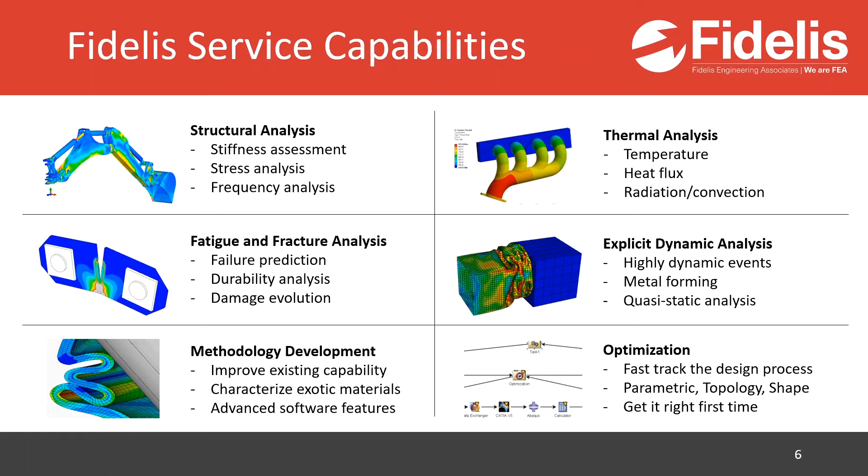Our software offerings range from the 3D Experience platform, which I want to talk about a little bit more later on. We do also offer Dassault standalone CAE products, so that ranges from Abaqus, which is the FEA solution, FE-Safe which can deal with durability, Tosca which allows us to optimize shape and flow, and Isight which is a process optimization software.

We do provide industry-leading support, with all of our engineers also being Dassault certified support experts. So again, that feeds into our narrative of being a customer-centric business.

So to get into the real crux of the presentation here, what are we talking about when we mention the shifting role of CAE in product development? Well, what we're really saying is we're moving from hardware-driven design more towards simulation-driven design.

Traditional hardware-based product development methodologies are break, fix, repeat type methods where we are doing a lot of physical testing, a lot of prototyping, and it's very expensive and very time consuming. Typically CAE might fall in at the very end of the process as more of a box to check. I think most of you on the call, if you're in the product development realm, might be more of a hybrid math-based product development method, where we're looking at still physical testing driven design, but supported a lot more by simulation. So we are learning still from our simulations, but we are predominantly physically based.

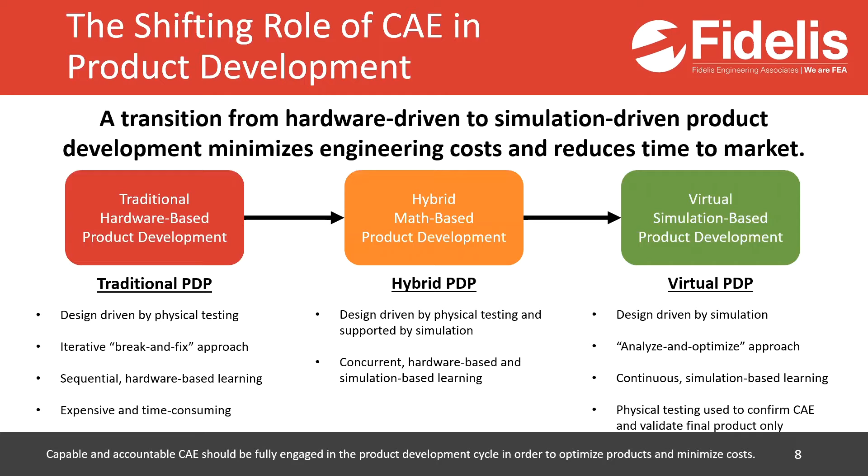And what we all really want to get to is this kind of holy grail, the virtual product development method, where we design by simulation, we optimize by simulation, and we are continuously learning using simulation, and then finally maybe validating at the end with physical testing.

Why do we want to do that? Well, simply put, it's cheaper and it's faster. We can front-load the problem solving part of the design process to the start, rather than having it at the end when we've spent a lot of money prototyping and designing off best practices. It eliminates trial and error engineering, and reduces development costs and time to market. We can reduce the number of physical tests or maybe eradicate them altogether. We can eliminate unnecessary development cycles, going round in circles where we're not really sure what's going on. And we can minimize quality issues that sometimes occur at the very end of the product development cycle once we think we've finished.

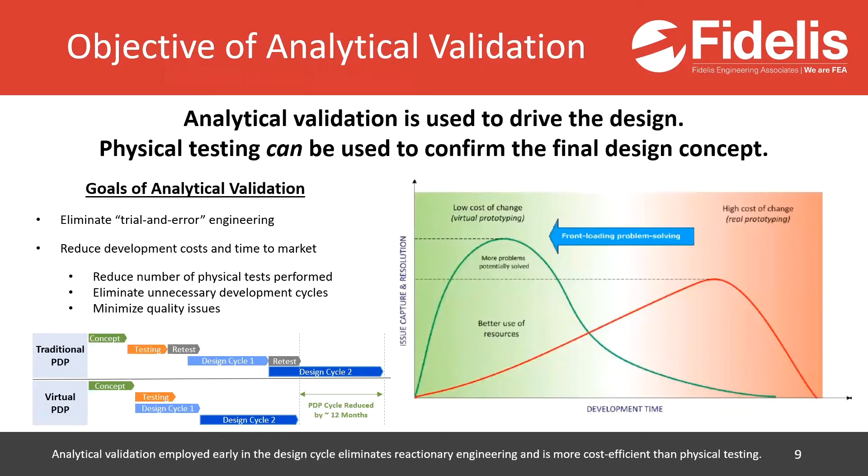So the virtual product development process still relies on having the right people in place. This quote I always like: owning technologically advanced software is not the same thing as truly being technologically advanced. We can own all the software in the world, but if we don't have the right minds to pair it with, it's essentially useless and a black box.

This is where Fidelis gets to separate itself from the rest of the more traditional FEA suppliers in providing end-to-end virtual testing workflows. What we need to do is understand the product development process properly, develop novel solutions to the unique engineering challenges that we face, and then importantly, package methodologies and results effectively so they can be used going forward.

The rest of this presentation will be based loosely on a case study that Bill and I worked on over the last 2 or 3 years, and that was with a predominant tier 1 supplier of axles in the Detroit area. We were tasked with developing CAE prediction methodologies for between 30 and 50 physical tests. The 2-year project was very successful.

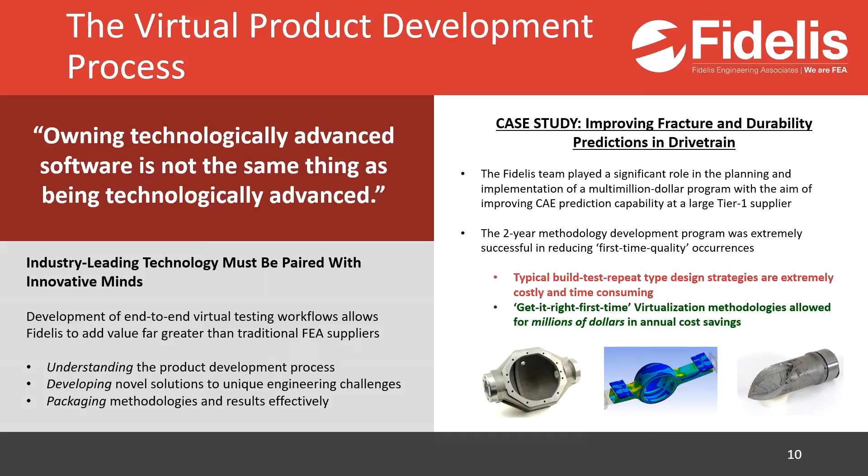We reduced first-time quality occurrences significantly, and that allowed us to get it right first time, save millions of dollars in annual savings, and kind of put to bed this old-fashioned build, test, repeat type design strategy that was there previously.

Before we go any further, it's useful to introduce the CAE Maturity Scale, or the idea of it. What we're looking at here is a way to characterize how much faith we have in our CAE methodologies, starting at 0, where we say we just cannot simulate this at all. Level 1 might say, well, we've got some capability, but it's not really very useful.

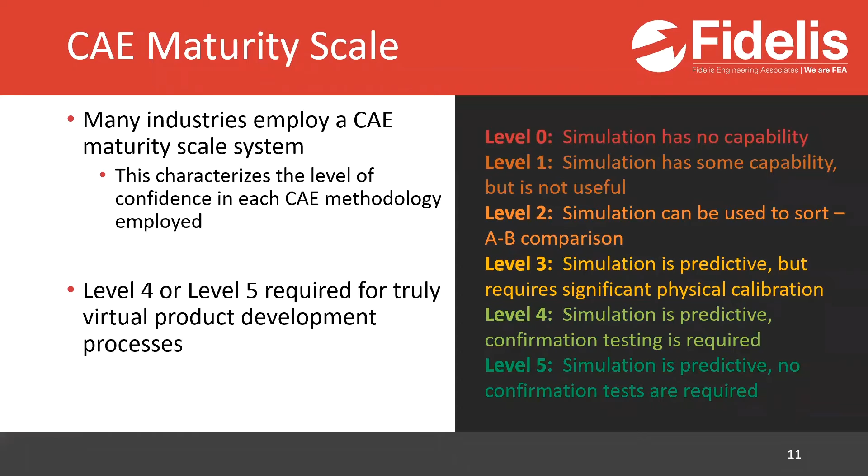Level 2, we can sort using A to B comparisons. And then really where we're aiming to get towards is level 3, simulation predictive, but not without physical calibration or a lot of physical testing. And then 4 and 5 is where we want to be. It's predictive, confirmation testing may or may not even be required.

So what were the challenges of going virtual? With this being more of a philosophical discussion rather than technical, we thought it'd be useful to focus on our biggest non-technical challenge that we faced during our 2 or 3 years. And that was conveying trust in a virtual product development process.

Typically, with traditional CAE, management might deal with the check in the box, as you will, at the end. They don't really see a huge amount of value in CAE. It's more of an afterthought. Designers might view it as kind of a nuisance where, well, you're telling me my design's not going to work, but I don't really believe the answer that you're giving.

Project managers think it might be inaccurate. They've seen a lot of data and they've kind of seen the CAE and it doesn't necessarily match up. And then testing engineers know it's inaccurate because they see the data every day. They just know that the CAE often does not match up with that. And there's a good reason for this. We'll take a look at it now.

Traditional CAE will provide one single data point when we ask a question such as, how does this part or assembly perform? I've got a little imaginary case study here, and we're going to ask our CAE department, how many cycles will this differential case see before it breaks? So we run our CAE, and we say it's going to last 274,698 cycles. I can tell you now that you have more chance of winning the lottery than that being the correct answer to this question.

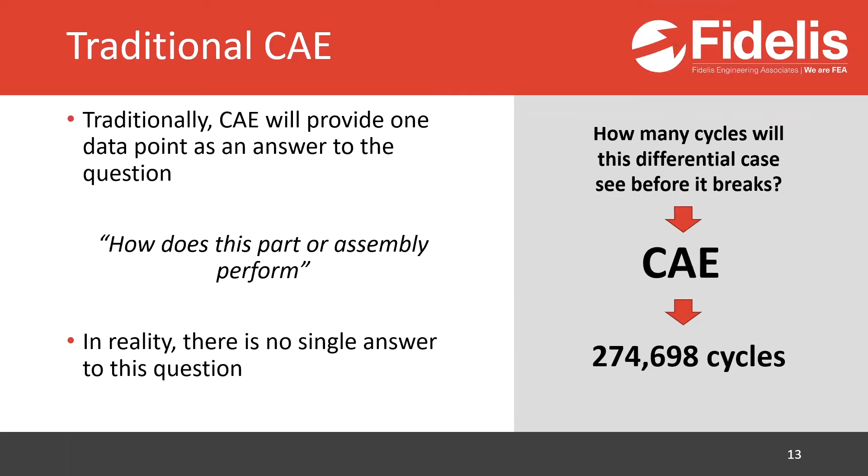Probably about 1 in 300,000 chance that this is the answer. In reality, of course, there's no single answer to this question. So from the lab or the field, this is more like what we see. I derived some physical test values of a fatigue test with the very advanced method of bashing the keyboard 6 times. But this is very representative of what we would see in real life.

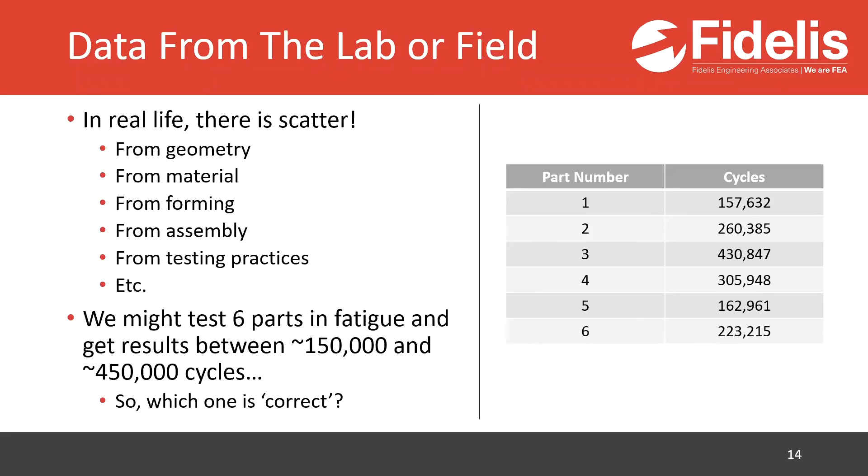And of course, in real life, we have scatter from geometry, from material, forming processes, the assembly itself, and then even as far down as, well, are the testing engineers truly testing the same way every time? The answer to that is no. So we might have 6 parts here in fatigue, and we're getting results anywhere between 150,000 cycles and almost 450,000 cycles. The question is, which one of these answers is the correct answer? And the answer is all of them are, right?

They all actually happened in our real components. And so now we're looking a little bit silly over here in the CAE department when we gave this single answer.

Typically, our end customers will want to know what percentage of parts will fail in service, usually in terms of reliability and confidence. Sometimes safety critical parts cannot fail at all.

Something like a turbine blade, a wing, a wheel hub, etc., might have a requirement of 1 in 10 million probability of failure. We don't have that much data, and we're never, ever going to have that much data. So we use statistical tools to characterize the behavior of a population with a small data set.

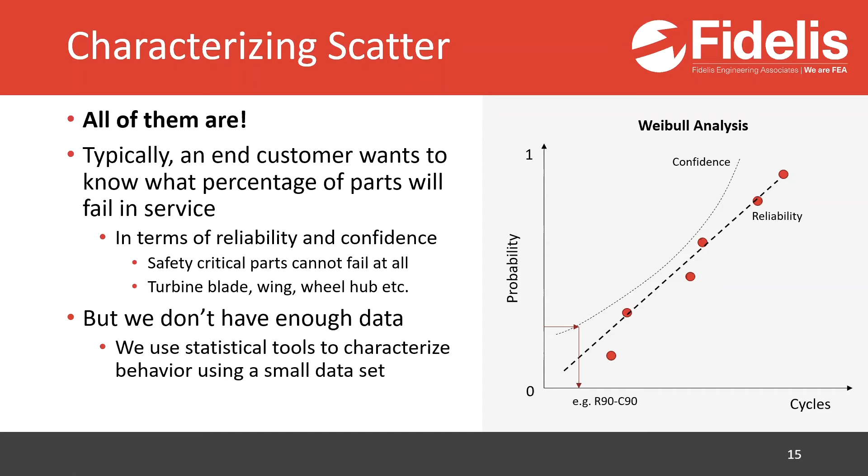Here's an example of what we might give for a typical automotive component. We might want a 10% failure rate with a 90% confidence. All of a sudden, our 150,000 cycle lowest test moves down to maybe 100,000, or if we want a 99% failure safety rate, maybe down to 50 or 30,000. Now our 250,000 cycle prediction is starting to look worse and worse.

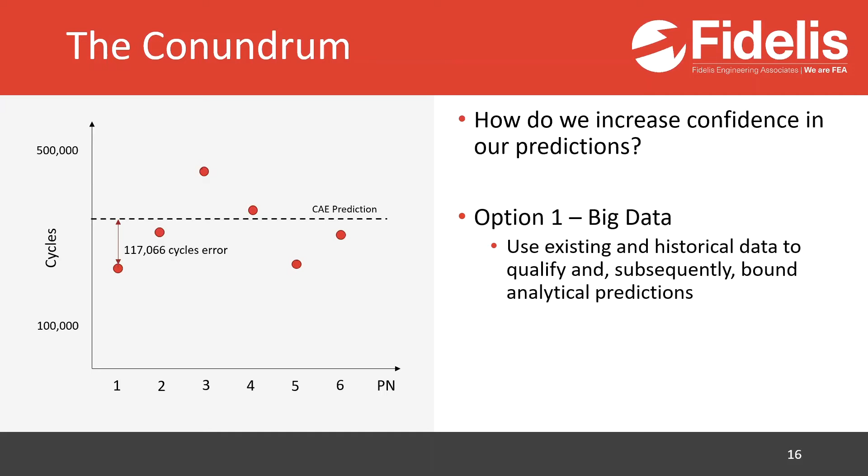This is what we came up with during the program. Number one, we can use big data - existing historical data to qualify and then subsequently bound our analytical predictions.

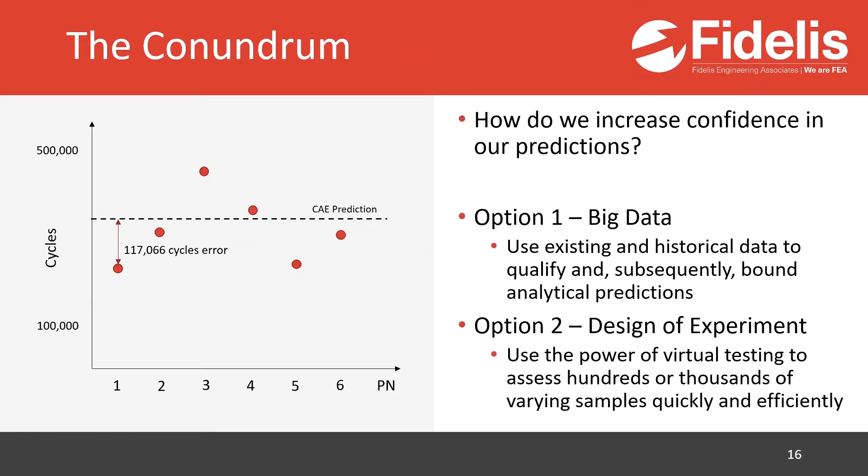Secondly, we can use design of experiment type methodologies, using the power of virtual testing to assess hundreds or even thousands of different samples very quickly and very easily. So what's big data?

Really what we're saying is that many organizations have years or even decades worth of data just stored either in the back of a cabinet or at the bottom of a server. It can be field data, it can be pseudo field data - we're thinking about test track and things like that. It can be lab data, all kinds of different data.

So how can we make use of this existing data in our current CAE predictions? First of all, we can use it to validate our methods. Step one in this process is still to have a method - we have to develop a method that we think can capture the physics at least acceptably.

Secondly, we use it to correlate with the existing data, and the more data we have, the better, obviously. Then finally, if we plot this on a log-log scale, we can visualize the prediction capability of our method and demonstrate relative predictive capability.

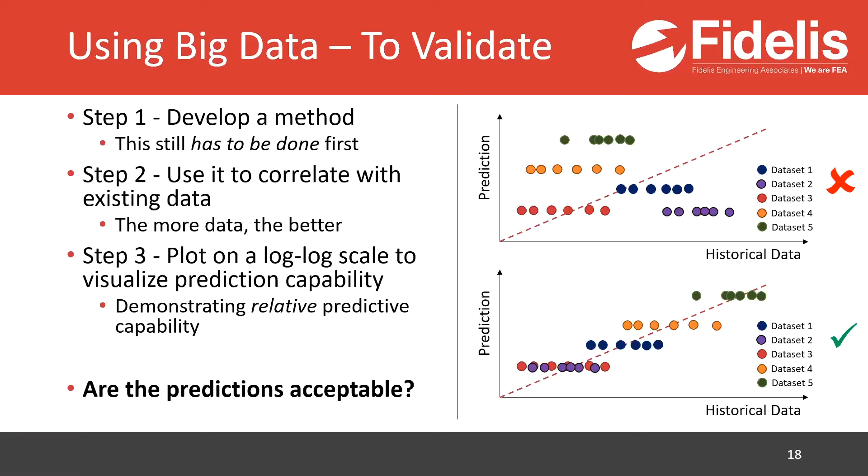One thing we should note is that we do have to go back and build models of old parts and old assemblies, which can be time consuming, but it allows us to build confidence within our CAE predictive capability. That's what we need to do in order to go forward with truly virtual product development.

Secondly, we can use our big data even further, and now we can use it to predict. So we're using Weibull again, and we're going to build some prediction bounds by developing what we call a prediction ratio, which is virtual versus historical. One would be perfect correlation.

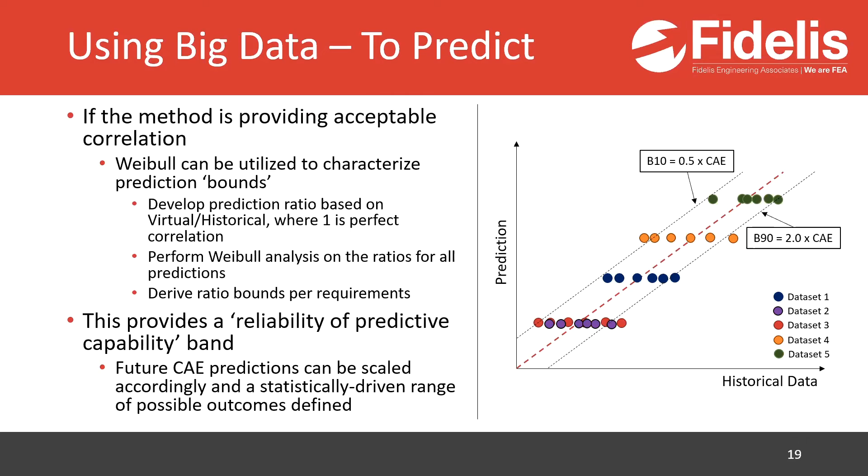For example, if I have an 80,000 cycle prediction, but reality was 100,000 cycles, our ratio will be 0.8. We then perform a Weibull analysis on this set of ratios and derive ratio bounds per our requirements. So then we end up with something that looks like this. We've bounded our data, and we have some scale factors that we've bounded our data by. What this then allows us to do is scale our CAE predictions accordingly and derive statistically driven ranges of possible outcomes.

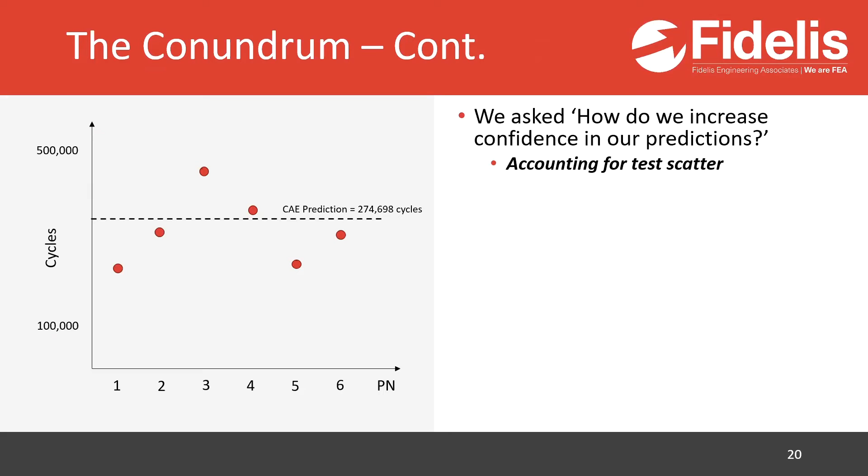And so previously we asked, how do we increase confidence in our predictions? We account for the test scatter. That was the missing piece in the puzzle. So now, instead of having a single value, if we take our example from previously of 270,000 cycles, we times it by a half, we now have 137,000 cycles. So we've bounded it on the lower end, and we have 500,000+ cycles on the higher end. And all of a sudden, our prediction capability looks a lot more convincing. Now we can go to management and say, we predicted accurately.

The scatter is always going to be there. We need to understand how to predict it better. We've got data-driven statistical analysis, and even more importantly, we capture the effects of physics and tolerance that we either couldn't predict or don't want to try and predict. So let's imagine a second phase particle was the cause of a fatigue initiation. We can't predict every single possible location of a second phase particle in a component. That would be literally impossible. This methodology allows us to capture unknown physics using historical data.

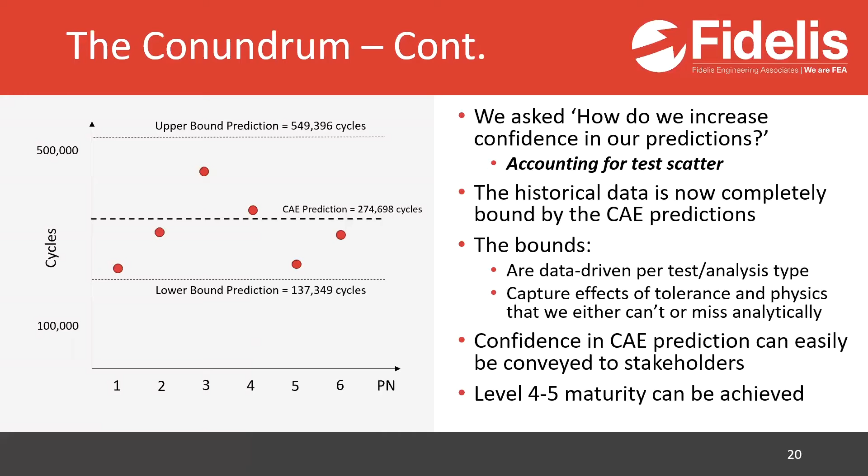We've now achieved level 4 or 5 maturity in our CAE method. But what do we do if we don't have data to begin with? We can't expect every customer of ours to have piles and piles of data laying around for us to use. If we remember, scatter is caused by geometry, material, forming processes, all the things we talked about before. How can we generate our own scatter? We can do this by knowledge and understanding of tolerance and physics effects on the final result.

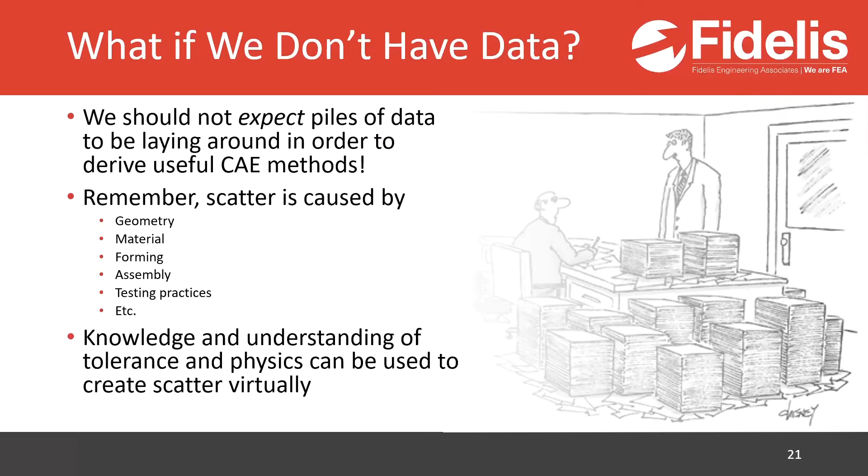And we do this by design of experiment type design. We parameterize independent variables and then run many combinations of these known possibilities to come up with enforced or analytical scatter. Response surfaces can be derived and plotted on this data, essentially giving us an infinite number of test results. CAE can then bound our physical test results, and more importantly, we can understand the effect of different tolerances on our parts.

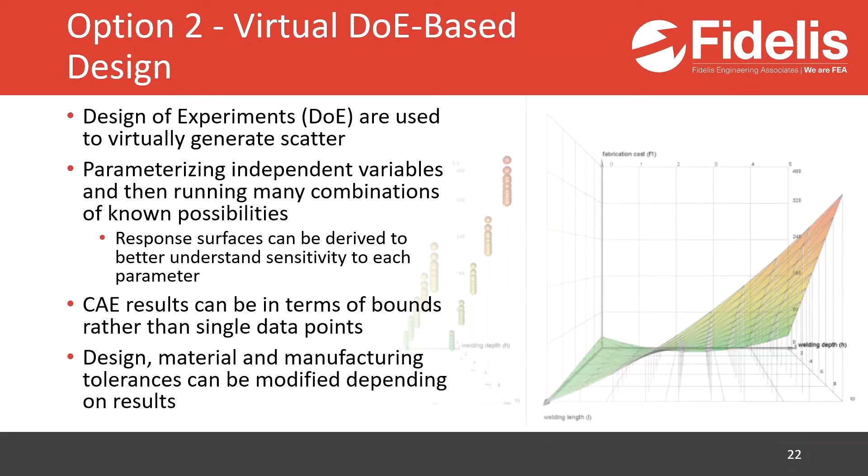So perhaps we might say, well, material had a huge impact. Let's improve our tolerance with material. Or having this fillet go from 3 millimeters to 4 millimeters gave us a giant range of data. And so we can decide where we want to spend our focus in our design process.

The requirements for a successful DOE are that we have, again, a robust model. We cannot get away from the fact that we need robust CAE methodologies. It's no use generating data for change in parameters if they don't reflect the real world effect of those parameters. Our changing in parameters has to be based on real world physics.

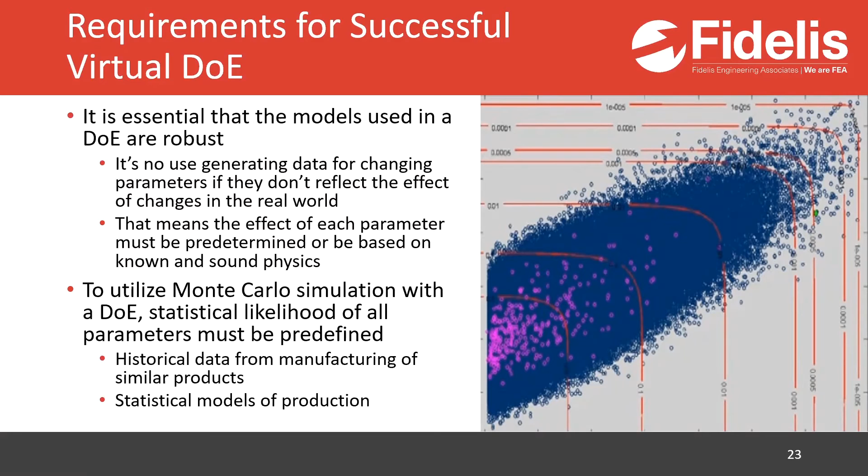Finally, we might want to utilize something like a Monte Carlo simulation with DOE, and that allows us to predict the statistical likelihood of performance based on known statistical likelihoods of data coming off the line. If we want to do this, we obviously need to know from some sort of historical data what our statistical models are for each parameter, or else we simply can't do something like a Monte Carlo simulation.

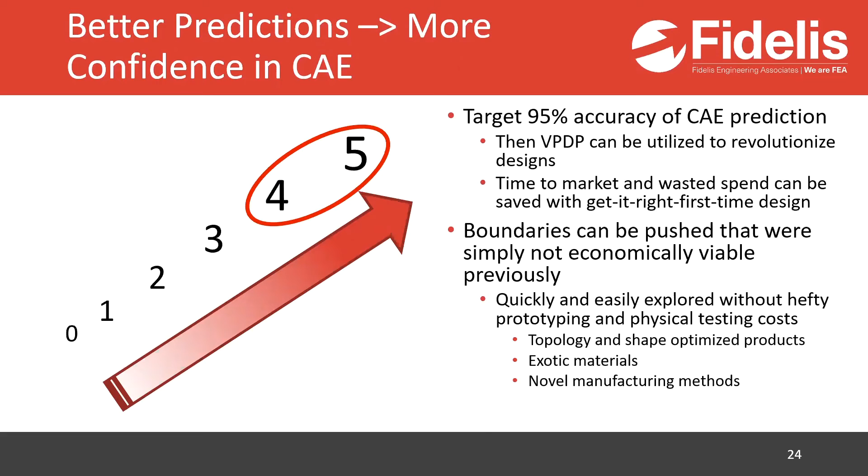At this point, we think we should be towards this 95% accuracy of CAE, and we can slowly start to build in virtual product development methods. Our time to market and wasted spend can be significantly reduced with this get-it-right-first-time design methodology. Something else to note is we can also push boundaries that simply wouldn't have been economical previously. So things like using topology and shape optimized products rather than more traditional methods. We can look at using exotic materials and novel manufacturing methods, maybe like additive, more easily explored without the hefty prototyping and physical testing costs that we would have traditionally incurred.

So a couple of examples of some of the work we did, just so you know we did do some work here. We looked at some high pressure die cast components. High pressure die casting allows us to rapidly produce quite complex shapes. In those complex shapes, we will always have many different stress concentrators. And fatigue prediction is extremely important in things like axle components. And so we have a myriad of challenges when it comes to high pressure die casting, things like porosity, flash, ejection defects, and what we're going to focus on here, stress gradient effects.

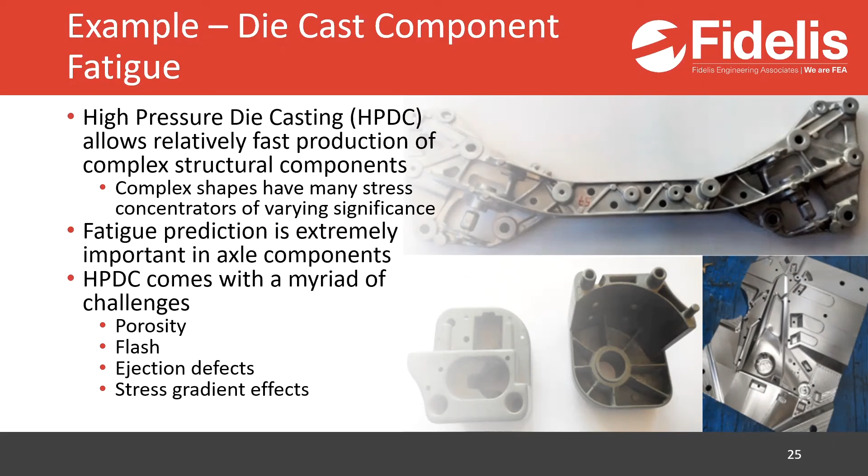Stress gradient is always associated with stress concentrations, and we can't get away from them. Essentially, every component we have will have some stress concentrations in it, and therefore some stress gradients associated with those. Stress gradients are known to significantly affect fatigue life, and if we ignore them, our fatigue predictions are very inaccurate. We get low life, incorrect failure locations, and sometimes even incorrect mechanisms.

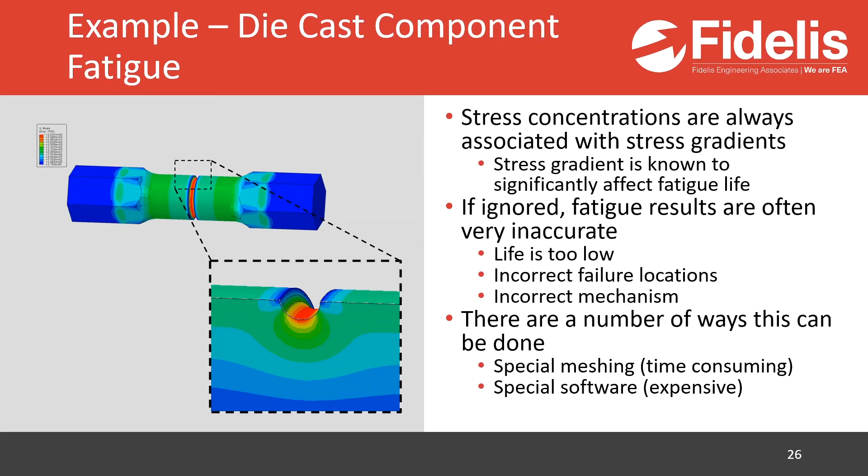There are a number of ways we can fix this, typically special meshing, which is extremely time consuming and almost to the point of being non-usable in a production setting. We can also purchase very expensive software designed just to deal with this problem. We didn't want to do either of those, so we developed scripting ourselves to extract von Mises stress gradients from every node within our models, and then use literature-based solutions to deal with the effect of stress gradient on these nodes.

What that really did is locally change the EN curve, the fatigue life curve, for every node, and it allowed us to provide benefit where we have these stress gradients applicably. This was then packaged in a simple-to-use GUI, and you can see from the lower right image, our correlation map is very, very good compared to what we could do before. We were able to consistently match initiation location and fatigue life using this method.

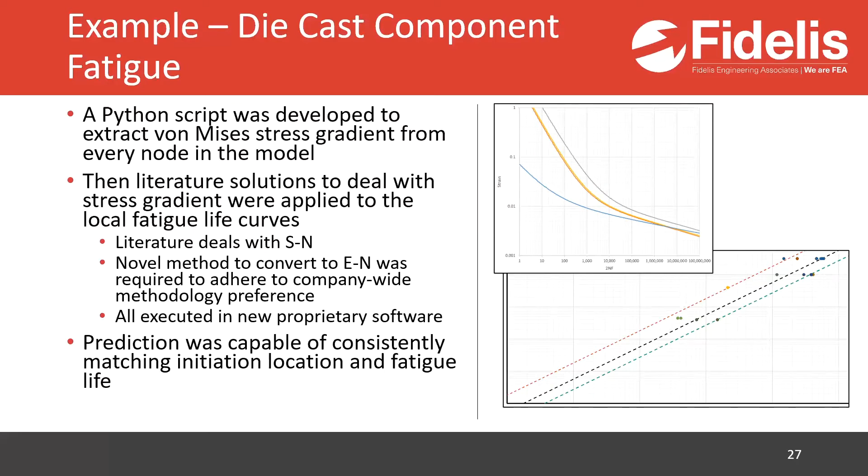The problem is we have complex stress states associated with mating splines, and added complexity because of our hardening method. We have martensitic phase change on the surface, which gives us a hard and brittle to soft and ductile transition between the surface and the core of the shaft. So we were challenged with developing new methodologies to deal with this in terms of both fatigue and ultimate torsion.

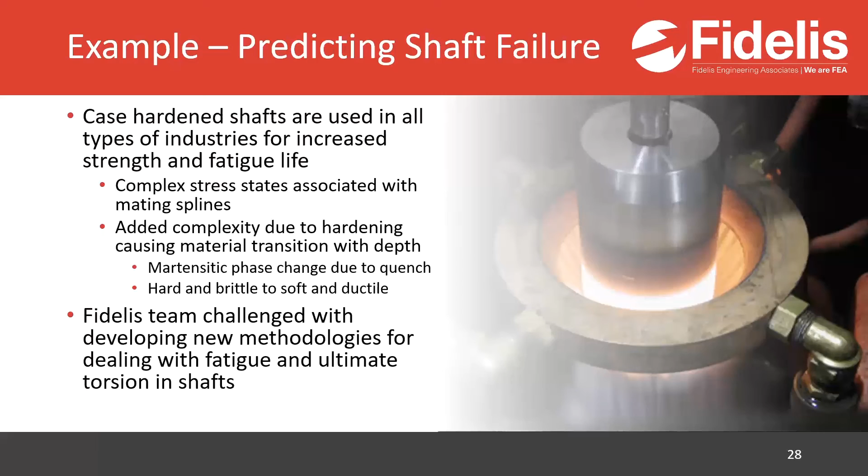What we ended up doing was casting aside our traditional FEA methods altogether and coming up with closed form solutions to predict notoriously difficult behavior in shafts. We've got material discontinuity, spline stress concentrations that are in themselves difficult to deal with, and when we've got spline rolling operations that don't necessarily match the CAD, we essentially have an impossible situation.

Closed form solutions provided accurate and timely methods for prediction of both fatigue and fracture in these case hardened shafts. In fact, we were able to take analysis times down from hours or days to 5 minutes using some very novel mathematical based models. You can see our correlation map there - again it's sanitized, but it's very, very impressive, especially compared to what we could do before.

The plot on the bottom right is a load displacement curve, and not only could we match the behavior of the load displacement, we also got the failure location, the failure load, and angle correct.

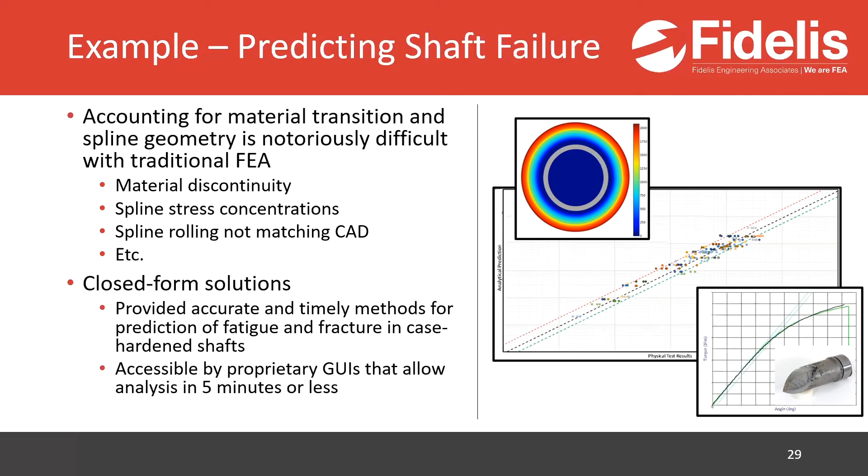I think it'd be remiss of us not to mention the 3D experience here, since it can help us massively use the ideas and methodologies we've just been talking about in real life settings. So what is the 3D experience? Well, Dassault calls it a business experience platform, and what this really means is it's a single source of truth-based PLM platform.

When we say single source of truth, what we mean is rather than a traditional directory-based data structure, we go to a database data structure, meaning every single person in the organization is working from one single file, and they access it using metadata in the database. In real world terms, what that means is we are no longer checking out files to do analysis, checking them back in for the designer to go check out, change, etc. We are all working from a single file.

That file, when edited, can go and affect our simulations. So we are no longer passing work back and forth. We're all concurrently working, which can save tons and tons of time. The 3D experience is packaged by role and not by software.

So if we have a designer, he might have the design package with the ability to do some simple simulation. The next guy might be a simulation engineer, so he'd have something more like a full FEA package, but wouldn't necessarily need the design roles. We can really tailor our capabilities to our employees. It's socially collaborative, and it extends across all disciplines within our organization. What we're able to do is break down typical silos within organizations and allow every stakeholder to have visibility throughout the whole process. So a marketing or sales person can see this design as it's coming along, they feel involved, and they don't feel separated from what's actually happening within the organization.

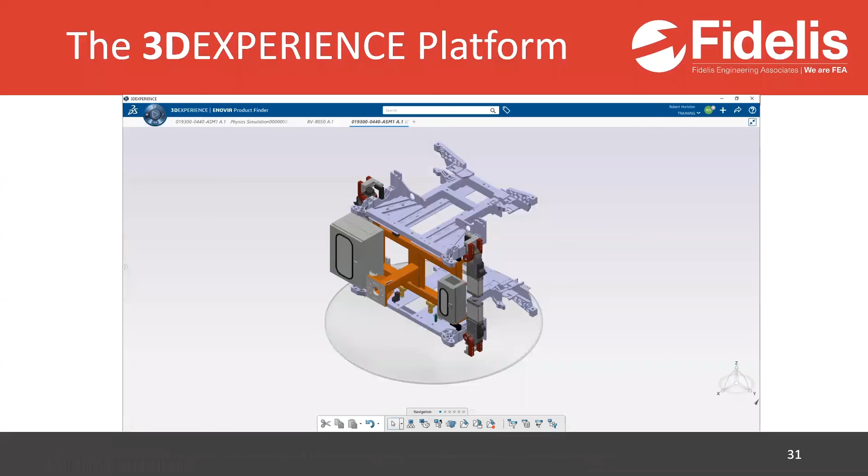This is what it looks like. It looks somewhat like a web browser. It's on the cloud, as I mentioned, or it can be. Really, the top left corner here with the widget, the compass if you will, is where all the magic happens. We have the ability to quickly and easily flip between our information intelligence, so our PLM, our change management, etc. We've got our social and collaborative button at the top there, which is kind of like a Facebook or social media platform. It lets all stakeholders be involved in the process all the way through. Of course, we've got our 3D modeling and simulation capabilities as well built in.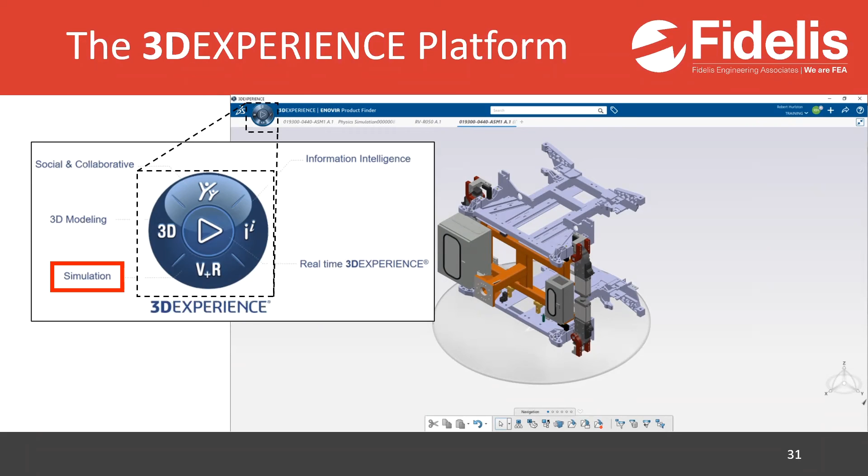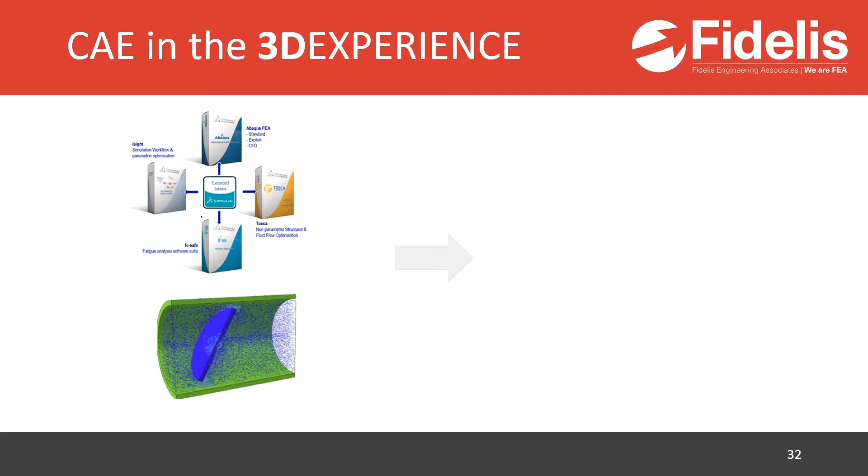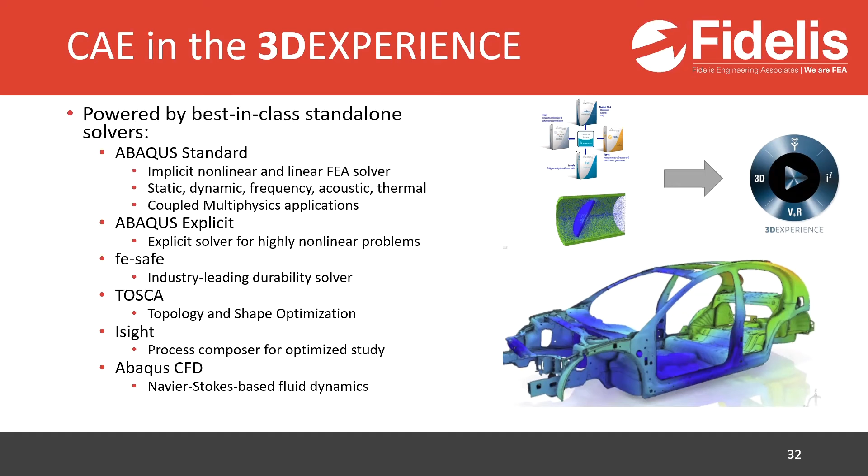We're going to talk briefly about some of the simulation capability within the 3D Experience platform. What Dassault did in the mid 2010s is take all of its industry-leading CAE capabilities and repackage it into the 3D Experience platform. So what we've got is the solutions we all know and love if we've used them before, just in a different setting. 3D Experience is powered by best-in-class standalone solvers - Abaqus for our FEA. It's got FE Safe built in for durability analysis, Tosca and Isight for optimization, and it also includes the previously discontinued Abaqus CFD solver, which is a Navier-Stokes-based fluid dynamics solver.

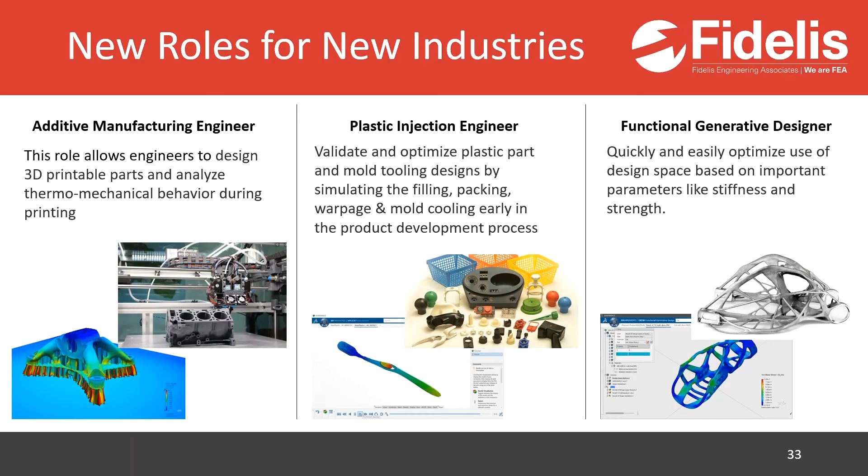And then finally, the functional generative designer is really Tosca within the 3D Experience. It's allowing us to quickly and easily optimize use of our design spaces and improve some of our basic and not so basic parameters like stiffness and strength. It also allows us to quickly and efficiently compare designs that we've done and look at key features of those designs like weight, performance, cost, etc.

So that brings us to the end of the Fidelis part of the presentation. I would like to thank you all for listening, and I think Joe might have some questions for us.